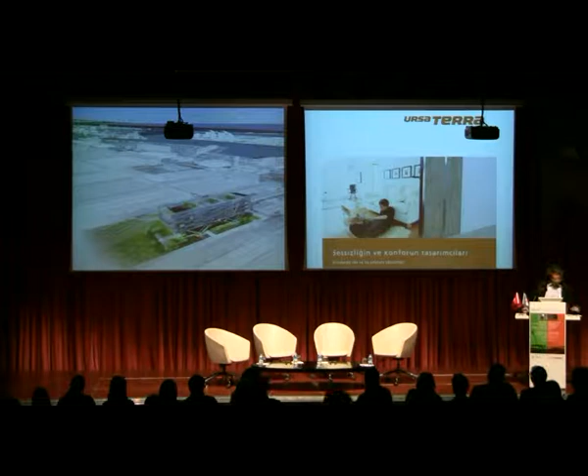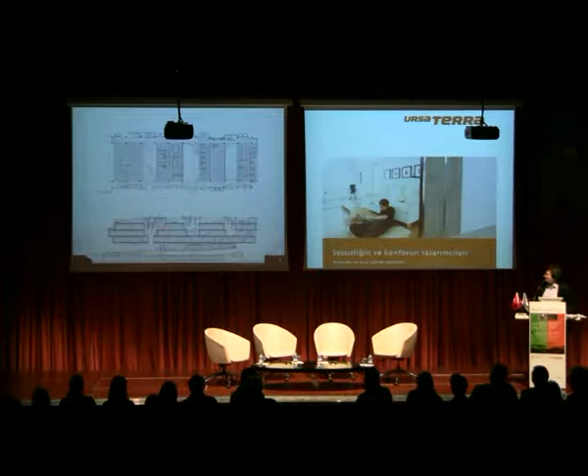This building should be a very efficient infrastructure in order to produce this function of research, and also a place where nature can settle, and light, in the middle of this industrial area. It's also a pattern of growth of the building inside the plot.

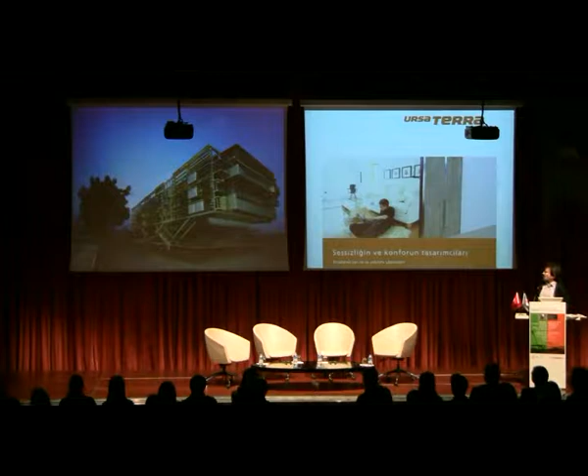This is our machine that tries to have some sort of facing to the industrial area, to make it a little bit more of a city and not a nowhere land.

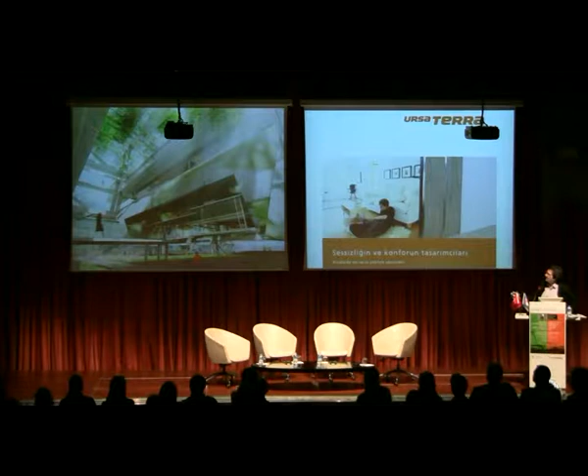This is a view of the entrance to the building. You see that the building is on some legs—you can have a garden underneath and look through it to the sea and to the port. And in the middle of the building, the plants and the light come through.

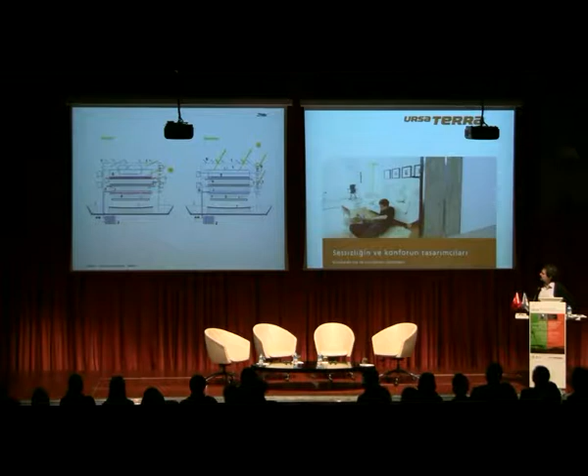This infrastructure is designed in terms of producing its own climate in wintertime and summertime, taking account of the inertia of the materials, the sun, the shade, and so on. So this is a machine, an architecture — it should be nice as far as it is efficient itself, and it should contribute also, as far as it can, to the city that is beneath it.

This is a project we finished recently, about one year ago, in the south of Barcelona. This is a hospital, quite a big building. I'm not going to talk about all the details, but the first thing is that it's a very big building, a hospital. You have some sort of respect to big buildings and to hospitals, but we tried not to impose a volume here, but to deal with proportion and direction so that this building is also part of the city and the growth of the city.

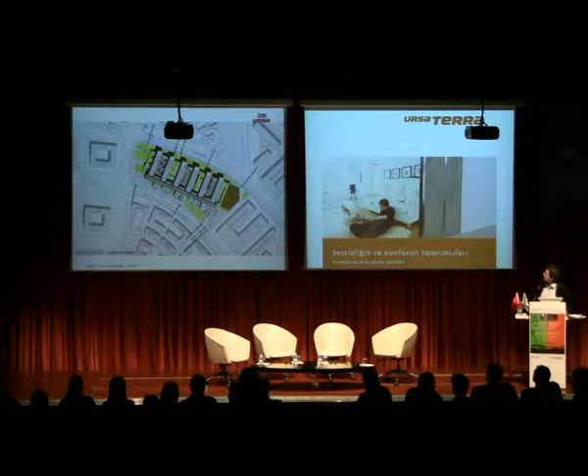These are some photographs while it was being finished. But I wanted to talk to you about this part of the building, which is the lobby, and also a covered street, 350 meters long. That is, let's say, a lobby and a street of a city.

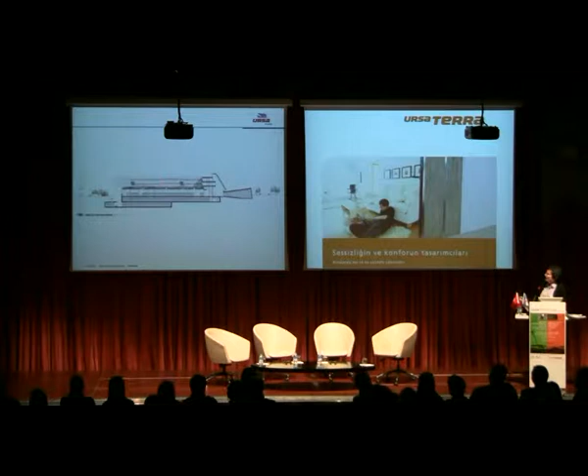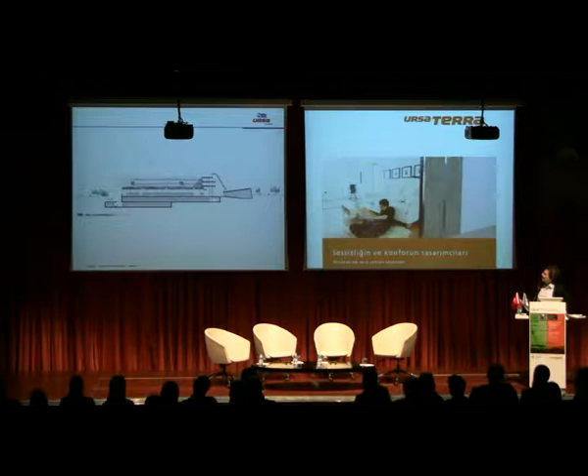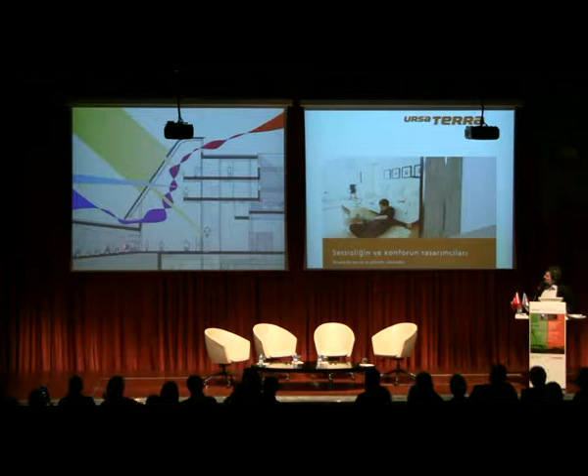By the design, by the form of the design, we were able to not install any kind of machine or equipment in this part, and to guarantee that inside this space it would always be between 21 and 28 degrees centigrade in any condition of temperature outside — just by the shape of the cover, like a chimney that evacuates hot air, just opening here and upstairs, also with a fan, because of the form and the proportion, so that the sun doesn't enter in summertime and arrives to the inside in wintertime.

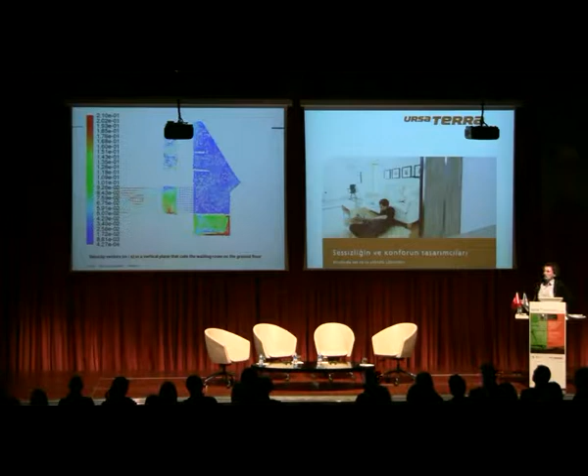And of course, with the systems of computing that give us information at the early steps of the project in order to take decisions in the form itself. It's not testing what happens when the project is done — it's a matter of testing what's happening in order to take decisions on the project.

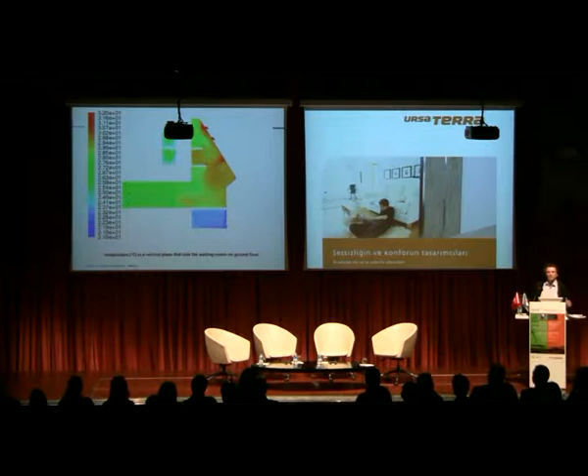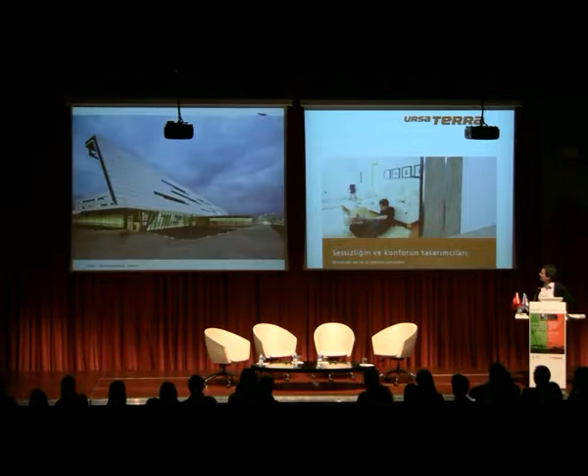So we are looking at what urban comfort is. Comfort is not only a matter of intimacy, not a matter of inner space, but besides all, a matter of public space, of the city itself. You see, all the components of the building have been industrialized — produced in a factory and then assembled on site.

And these are some gardens that are on top of the building. These two floors are the rooms for the people who are ill and sleeping in the hospital. So they have the reference of this new ground floor, which is on the roof of the building itself. This reference of the ground floor makes the people leaving the hospital feel like they're living in a more domestic place, like some sort of small piazza in a small town.

And this is an image of the first level under the ground, where with these patios we can have sunlight and feel it as if it was the ground floor. So we are saving then on artificial light.

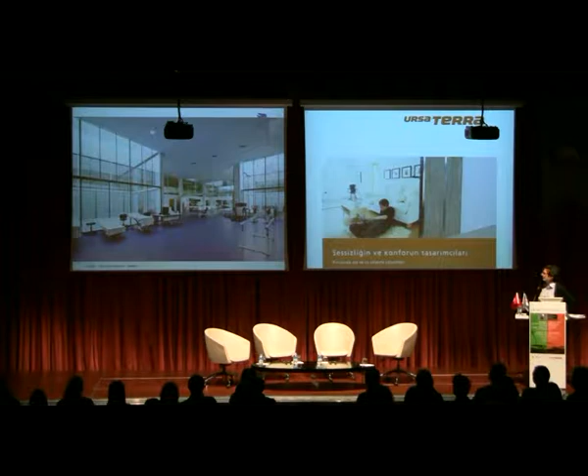The second concept I would like to talk about — Miguel Angel talked a little bit about that before me — is the idea of industrialization.

Let's say if we think of our buildings as components that can be produced in a factory and then assembled on site, the first thing we're thinking is that the territory, the plot, the land, has a value for itself — not as a place in order to have a building on it, but something which is valuable, that in a period of time will host some components making a building, but after some time, maybe some years, these components will be recycled, disassembled, and not destroyed. And this place will have its own entity again in order to do whatever we want.

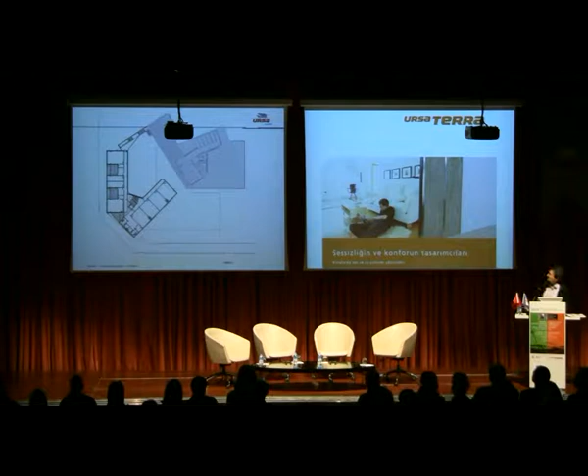This is a school we built in Barcelona on a very dense plot. You see here the structure: steel frames welded and assembled in a dry way on site. Then there are pre-stressed concrete slabs that are simply placed on the steel frames.

And then you see the facades, how they are welded and put in as concrete facades. Afterwards the concrete faces to the inside, and outside we are putting the insulation, and finally a very thin polymer concrete in order to have ventilation outside the insulation.

Having the concrete facing inside for a school is interesting because it's a strong material, and because of the thermal inertia facing inside, you reach a constant temperature inside during the whole day. This is good for a place with a lot of people and a lot of changes throughout the day. And finally, the building, once it's built -

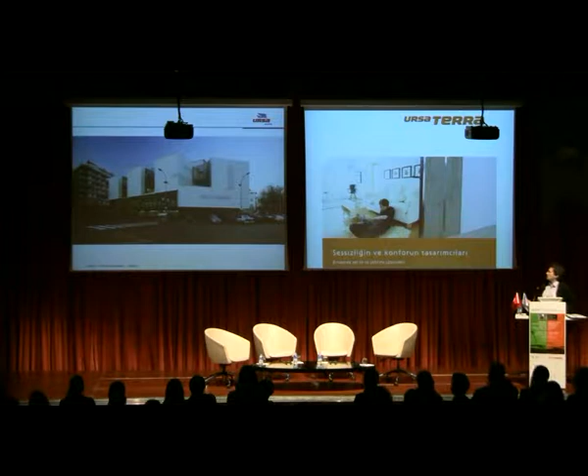these patios face the west facade, which is a very hot facade in Barcelona. So we have big windows for view and sun, but we have louvers outside that keep the sun from getting inside.

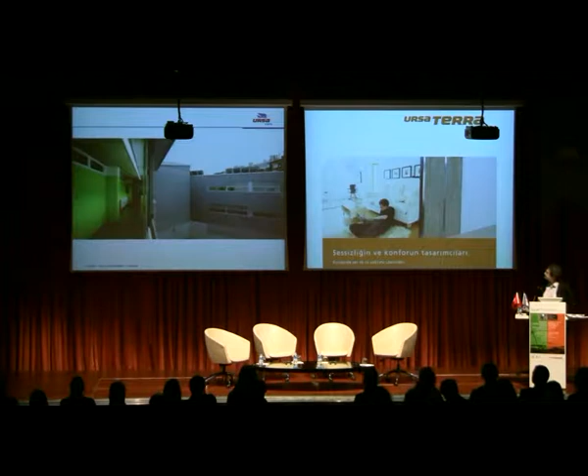Here I would like to talk about the last concept, and I will call it atmosphere. We are all part of the first generation aware that we have seen photographs of our planet taken from outside it. We know our planet has an atmosphere, some sort of membrane. Under this membrane we live - we can live. Without this membrane we wouldn't be able to live.

Scientists like James Lovelock and Lynn Margulis, who took part in NASA programs, settled the first principles of what we now call scientific ecology. They discovered that the biosphere is not something previous to life - the biosphere is itself a construction of life. Before life, our planet was just a mineral ball running very fast through the universe. It was life, with very schematic and basic forms at the beginning, that built the entire biosphere in order to develop toward major complexity.

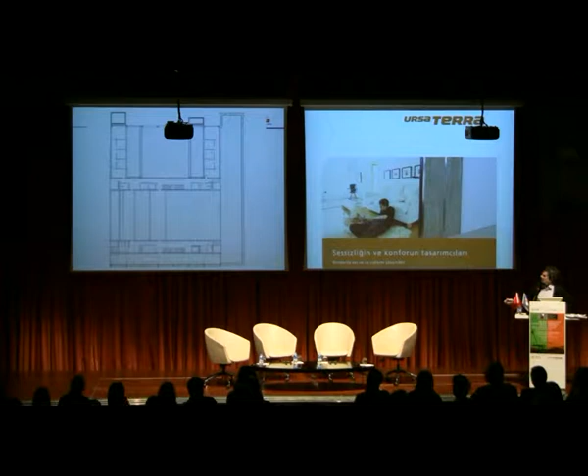This is a cross-section of the call center hall. You see the people working in these breaches, in contact with all this air, let's say, and here we have this artificial atmosphere that closes this space.

And this is in the north part of the building where the offices are, when we need more closed elements. And this is an air chamber, plenty of humidity and shade, that will be used as a refreshment of the air for the rest of the building.

And in this time it was the TAS program that allowed us to test our idea in the early stages, and make possible that we take decisions of the project on the form of the project in order to improve the behavior of the speed of the air and so on.

I must say that, of course, computing programs are not before the mind of the people. We architects, technicians, we have intuitions, and the intuition, the ideas, is things that start all the process. And the programs and computers are instruments in order to test how good are our ideas. Ideas are always good, but the fact is we must test if they are good enough in order to continue with this kind of ideas.

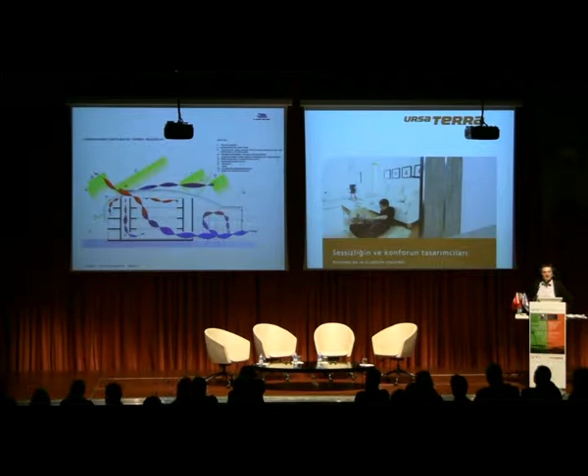And these are two images of how this architecture machine is working in wintertime and in summertime, taking account of the airflow, the radiation of the sun, the water, the ground floor, etc.

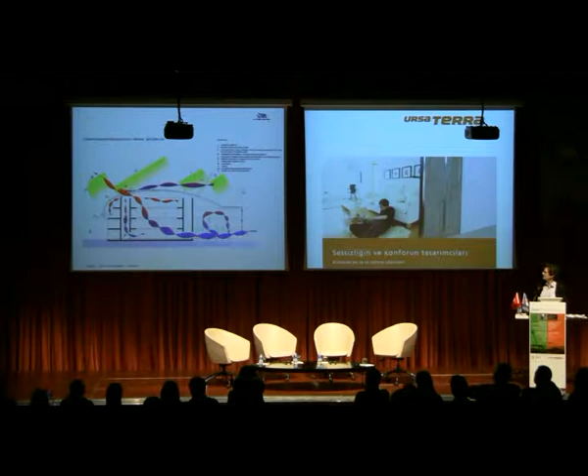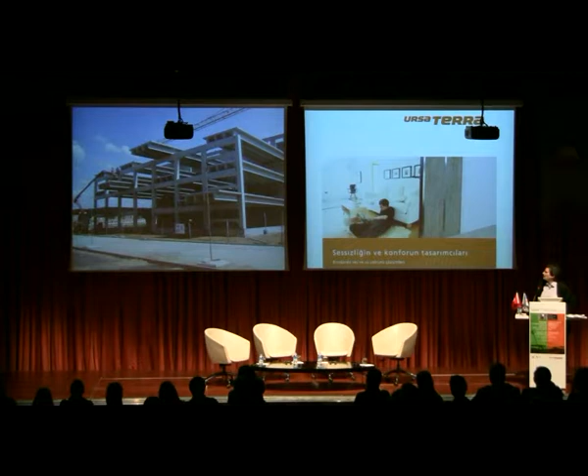And these are some images of how the components of the building are being assembled in a very fast way, each one in its typology.

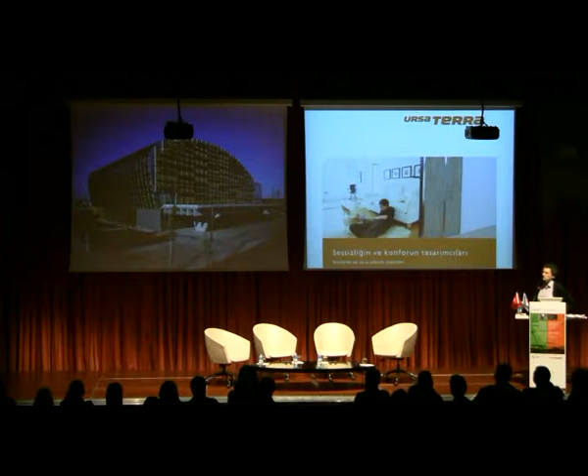And some images of the building when it has been done. You see, each facade is different because what's happening inside the building is different, and because the conditions of the sun and temperature are different too.

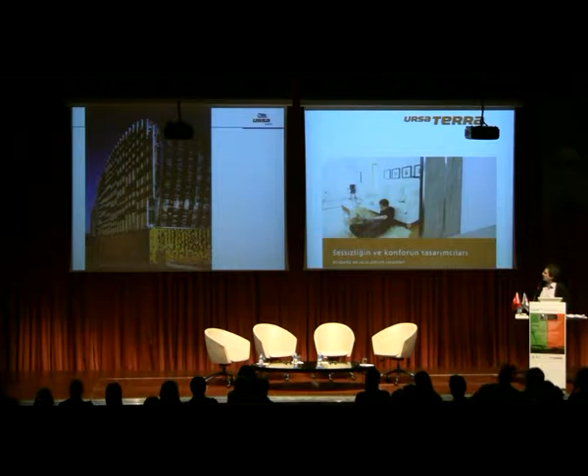All the pieces of the building have been produced on factory and then assembled in a dry way on site.

You see, inside, people are working, and here from the entrance you cannot see the people, but you can see the void and the volume. And let's say that we wanted, and we tried, that the materials that arrive to the building site show their own appearance. So they are not materials that are inside and materials that are outside - maybe some, but as far as we can, we try that the material is its own appearance.

And that makes it so we can save a lot of material, and also that we can put the appearance of some kinds of materials that are usually not seen. So we try to make things good, well, the first time.

If you make a brick and you know that this brick will have another material upon it, you will make a bad job, because you know somebody else will cover it afterwards. If you say that this brick is going to be seen finally, your effort will be not only to make a brick with a very high quality as a material, but also to make a wall made of bricks of high quality too, because it is the appearance of the building.

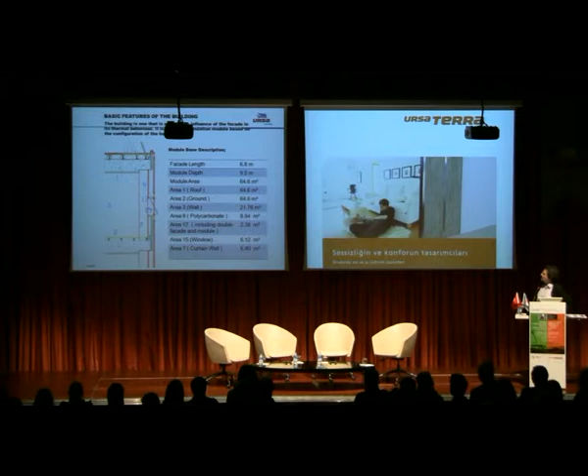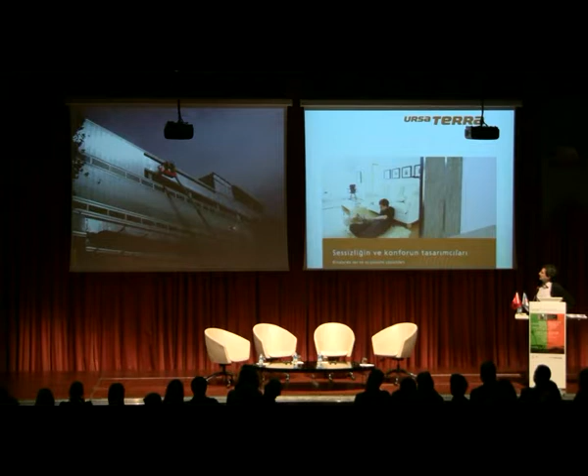And that's some phases of the work. Here, in the walls that don't have polycarbonate on the inside facade, we have isolation with an aluminum sheet that keeps out the dust, reflects the sun, and gives this kind of transparency appearance.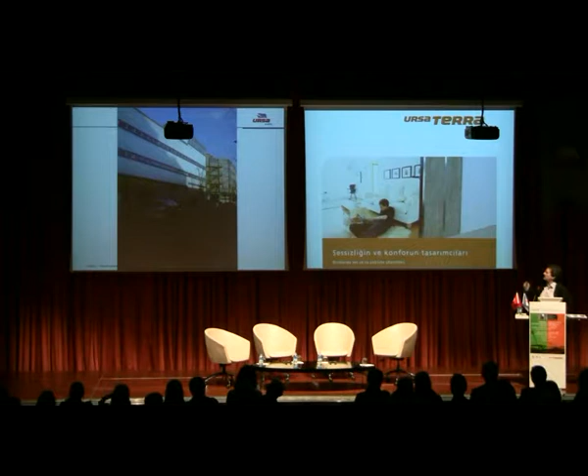So that's the building, what has been done. It has the idea of transparency, like a glass, a frozen element.

And once it's getting dark outside, we have the light from the inside going to the outside, and you see the colors that have been plotted for the inside polycarbonate expressing themselves to the outside. So the building changes from day to night.

And here we have the system of this green roof that is able to store water, with a porous concrete slab, insulation, a geotextile that stays in the rainwater, and then some ground sand on top and plants.

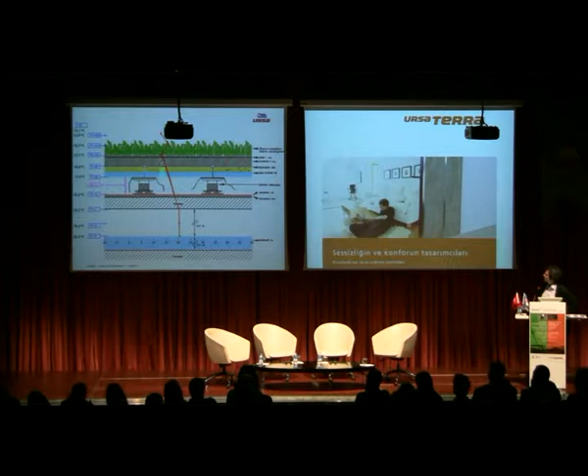And these are some monitoring readings of the temperature in the concrete slab. You see the changing temperature in the slab, in the inner facade of the slab, is the same as you would have in a cave some meters under the floor, which has a constant temperature.

And then upstairs you have a new ground floor, a new natural territory in the middle of dense cities. So we can store rainwater, insulate the flat underneath, produce a garden, and plants that filter CO2 from the pollution of city centers. We can produce single-family typologies that nowadays must go far away from the center, then take the car to come back to the center every day.

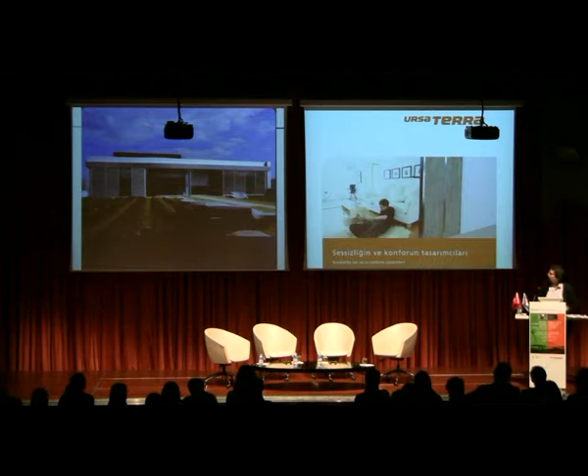And I would like to end with this project. It's in the city of Lérida, in the north of Catalonia. This is the first phase of a renewal of all this equipment, which is an ancient facility for military services.

And the town hall wanted to build here a new research center for research in agricultural technologies, because Lérida is a place where agriculture is very present. And we proposed to the town hall not to destroy these buildings, but to recycle them into the new function.

And the fact is that this first decision of architecture, the most ecological one we could have taken, was possible because maybe 70 years ago, when this building was built, some architect was able to think of something that goes beyond the direct function. The direct function was simply an equipment for sleeping for the soldiers. This could have been done in a much simpler way, but he left this kind of patios, this kind of porous building, that allowed us to do this.

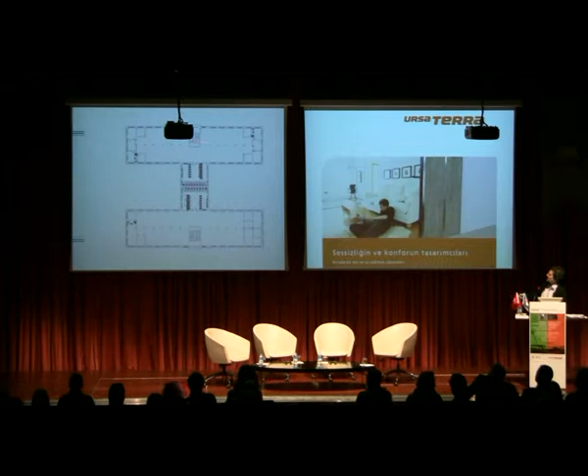This is what we found when we arrived: 3 buildings, one next to another. And what we propose is to connect these 3 buildings with a greenhouse roof taken directly from the agriculture industry, making this only one building connected by this patio.

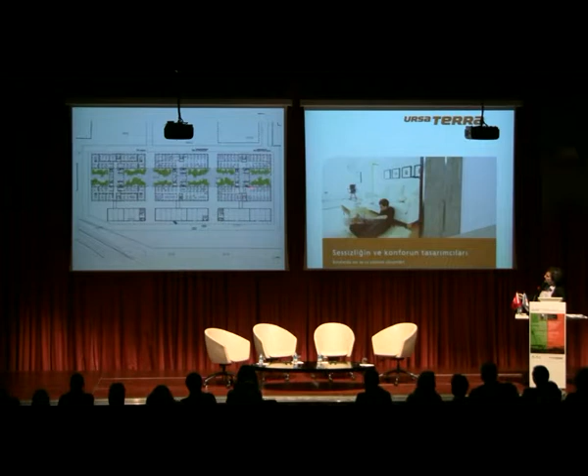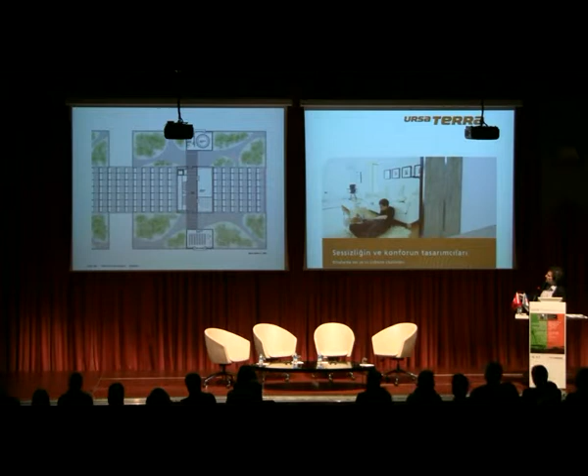That's this kind of greenhouse roof, and on top of the building we make a green garden storing water, and use this new ground floor as part of the pedestrian use of the building.

This is physically our greenhouse roof, which had to be recycled from a Dutch industrial plot, then disassembled and assembled again on top of our patios in Lérida. So what we were doing is translating knowledge and technology from the agriculture industry into the building and architecture sector.

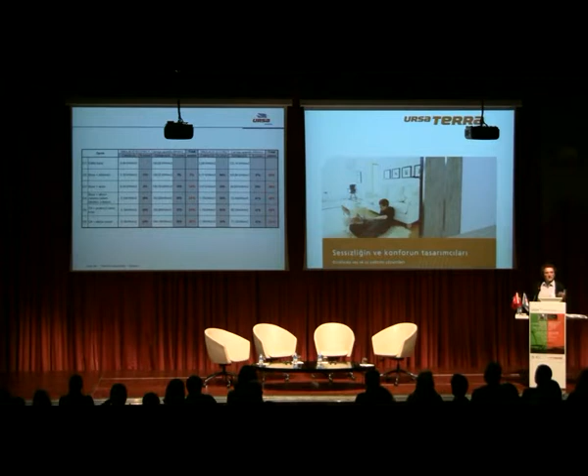And this is a tool we made with different programs in order to know basically the gains of different decisions we could take at that moment, putting numbers in terms of economy, to see which were the best decisions in terms of economy and energy at that time.

And that's how this system is working. In wintertime, we have maybe 0 degrees outside, very cold, and the effect of the greenhouse roof is going to make this inside hotter and hotter. The massive walls giving to the patio, in this case without insulation, are going to store the heat during the day and let it go during the night. So when the sun goes out, it's still a little bit hot, but outside we are insulating from the outside facade and shading it.

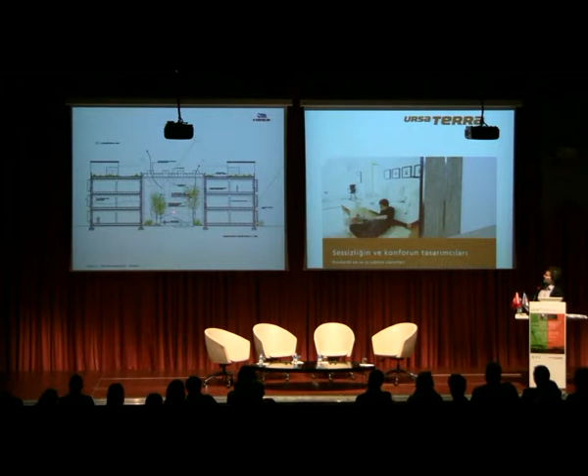And in summertime, we are going to open this green roof. We are going to open some louvers downstairs. There are some plants that are going to shade. We have some shading here downstairs and some water, spreading water, so the air, very hot and very dry from the outside, can have a lower temperature because of evaporation. We can manage, in wintertime and summertime, even 9 degrees difference between the top outside temperature and the inside temperature.

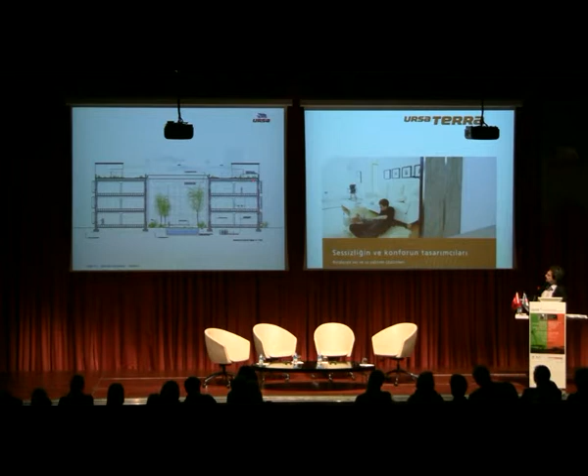And this is the water cycle. We have all the rainwater that comes out in this building, and it will be stored in the roof or in some tanks downstairs underneath.

And these are some images when the building was just finished.

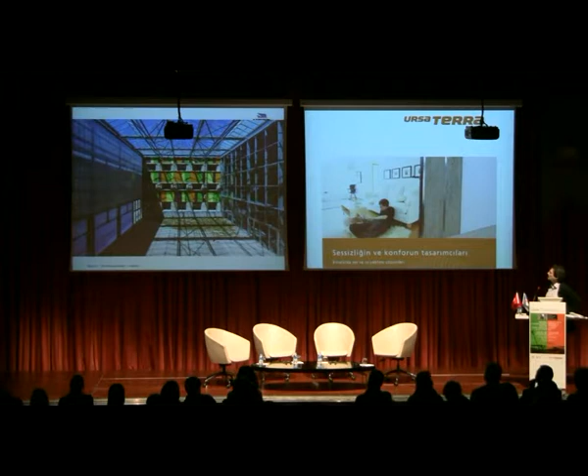We tried to... of course, this was a place, a very sad place, a very grey place, because at that time it was a military place. So we tried to... it was not a matter of restoration in this case. We were not asked to restore some past, splendorous past of that building. We were asked to recycle its material without taking it out of the plot as a territory, but giving to this new building a new memory and a new life.

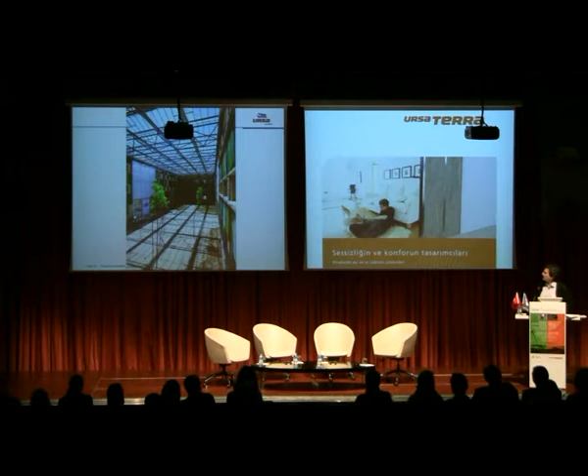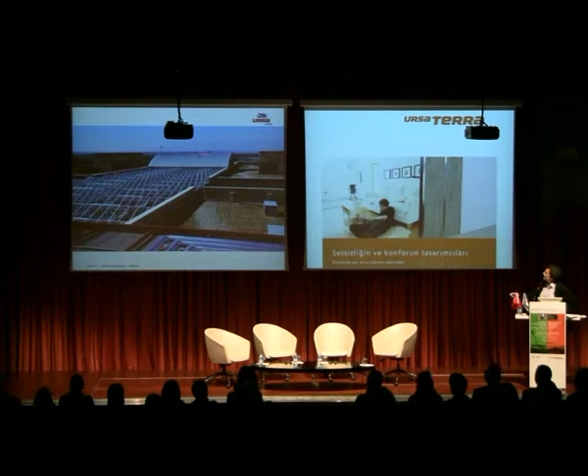So we tried to play with colors and we tried to make that old building smile again. And these are some images when it was finished, now it's green, all that. So this is the pedestrian path all around the top of the building, where you can see a very wide view to the outside.

And you know, at that time, society had the dream to fly. They needed to fly, and they were mentally and culturally prepared in order to fly. And there were, at that time, a lot of groups of people trying to find the technology in order to be able to fly. And the Wright brothers were not the best qualified in terms of knowledge, in terms of economic power, in terms of political connections. But their profession was to build bicycles.